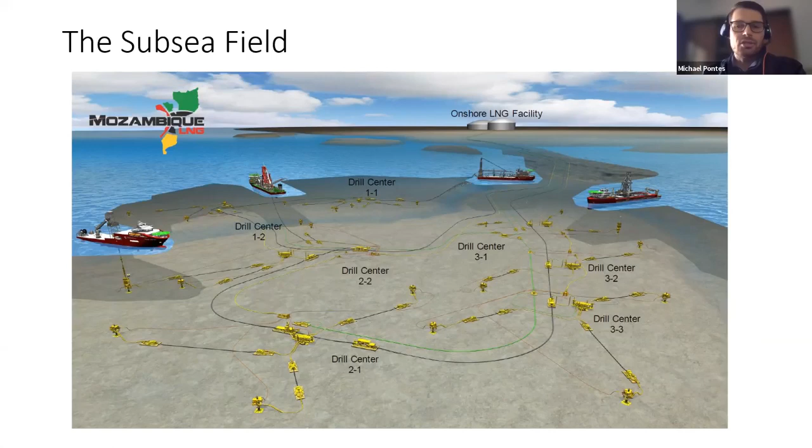We can see the onshore LNG facility that will be constructed in Afungi, and it is connected to the subsea field far offshore. What we see here is several Christmas trees, manifolds, flow lines, various equipment that are going to produce the gas and then allow it to flow back to shore to Afungi. Then what we see here on the surface are various vessels that are involved with the installation of equipment and different operations that we do offshore during the installation and during the lifetime of the field whenever several operations need to be done.

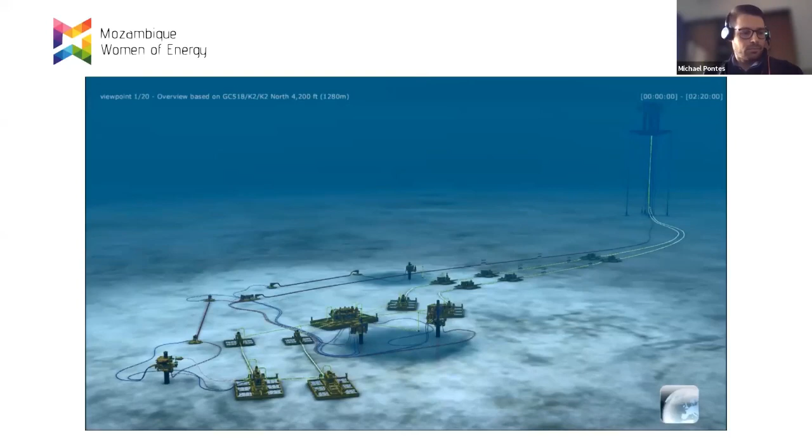The subsea system encompasses all equipment between the reservoir and the host facility seen on the far right of the screen. It is quite literally the conduit through which hydrocarbons are safely transported from their source beneath the ocean floor to a facility where they can be processed. Subsea developments can stretch across tens of miles of seafloor and be located in water depths up to 10,000 feet. To best understand how each component in the system works, we must begin near the source.

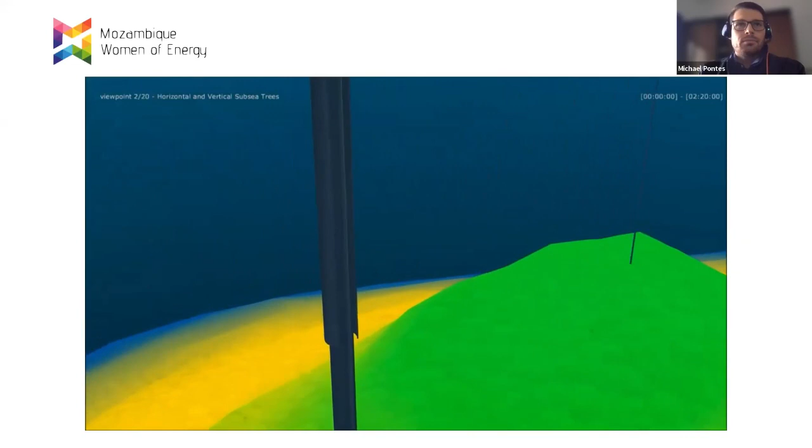As you can see, we are now beneath the seabed looking down at the reservoir, which could be up to 5 miles from our current position. Reservoir size, shape, and composition will play a significant role in the design of the subsea system. In order to move production from the reservoir to the seabed, we must drill and complete a subsea well. The subsea well is comprised of a number of concentric casing strings which are drilled and cemented into place. Once these casing strings are in place, the production tubing is installed at the center of the well. This is the final conduit through which production is transported to the seafloor.

Of the 20 to 30,000 feet of...

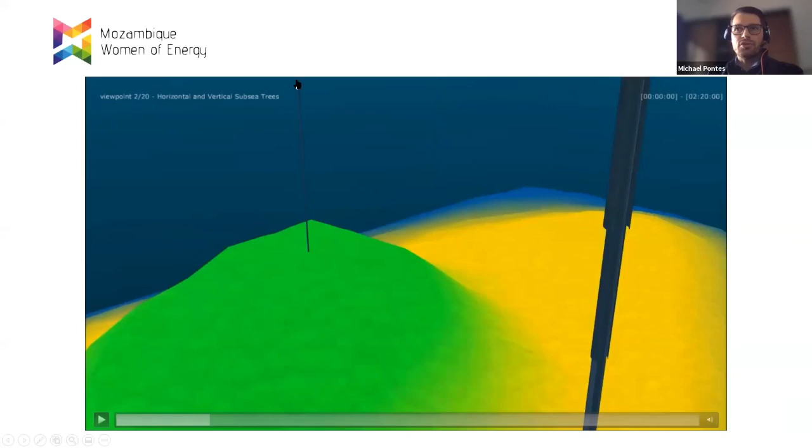So just to recap what we just saw, what we're looking at here now is the reservoir below the seabed, and this could be many kilometers below the seabed. And to reach it, we need to drill these wells to get down to it. And these wells will guide the gas or the oil up to the surface. And here, once they reach up to the surface, they will be processed by the Christmas trees.

I'll allow the video to continue.

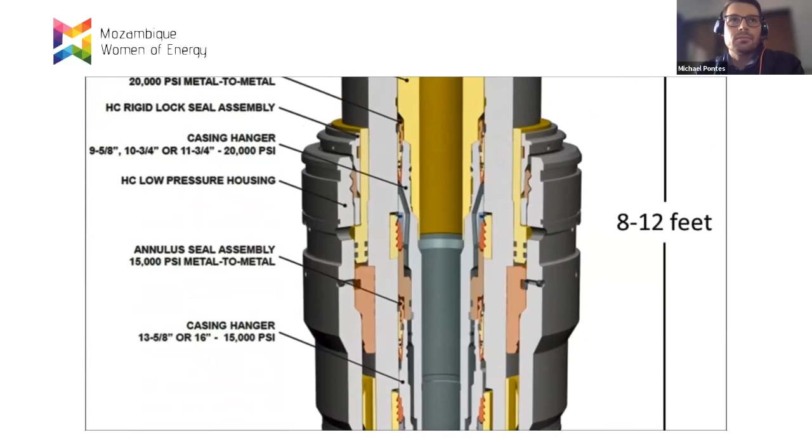Production tubing is installed at the center of the well. This is the final conduit through which production is transported to the seafloor. Of the 20 to 30,000 feet of casing and production tubing, only 8 to 12 feet of the well actually protrudes above the seabed. This top section of the well is known as the wellhead and is where the weight of each casing string is suspended.

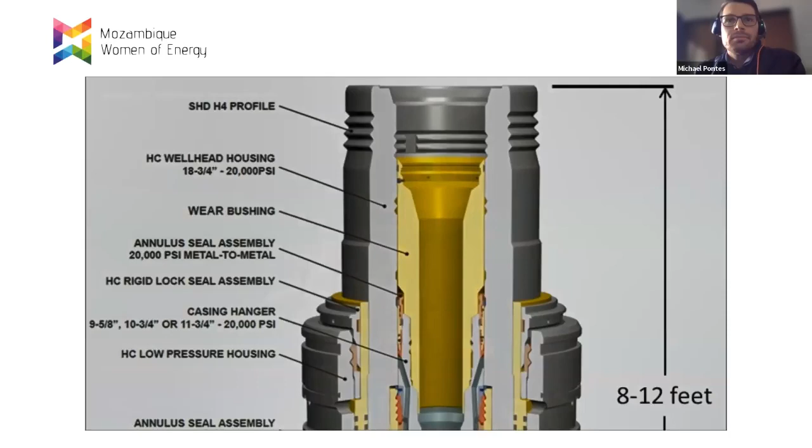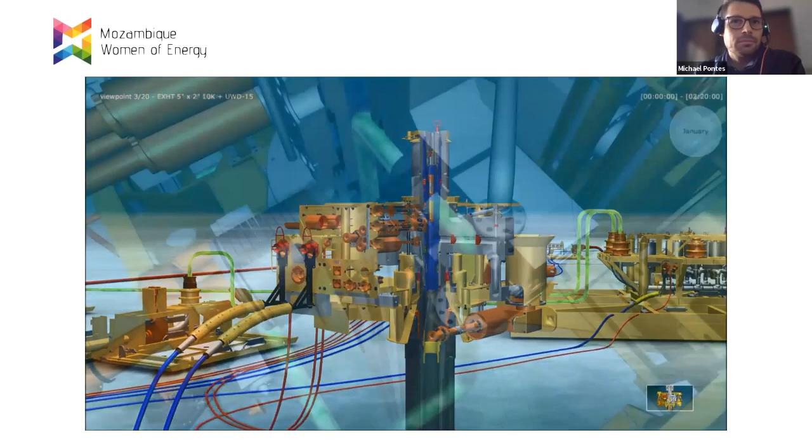Now that we have a conduit, we need a way to safely control the flow of hydrocarbons up and out of the well. This control is provided by a device known as the subsea tree. The subsea tree has several critical roles within the subsea system. First, it is our primary line of defense when containing production from a subsea well. The tree is equipped with gate valves designed to shut in the flow in the event of an emergency or for a planned shutdown within the field.

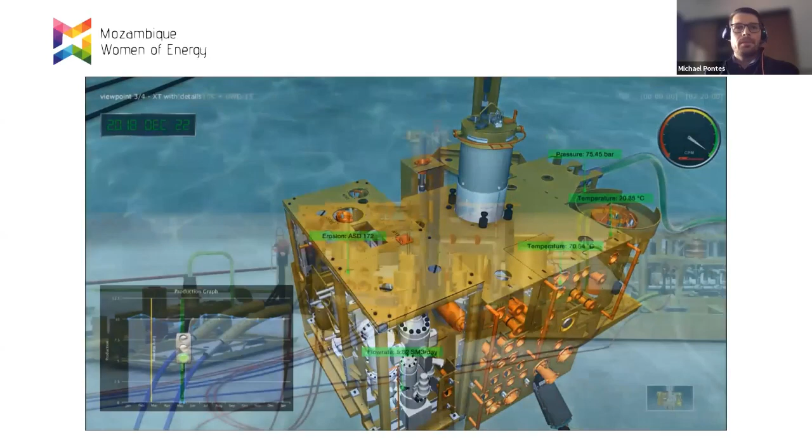Second, the subsea tree allows the operator to regulate the flow of oil and gas from the well through a device called the subsea choke. And last but not least, the tree is equipped with numerous sensors, meters, and chemical injection points which allow the operator to monitor and condition the fluid as it leaves each well. Together, these functions make the subsea tree one of the most critical components in the subsea system.

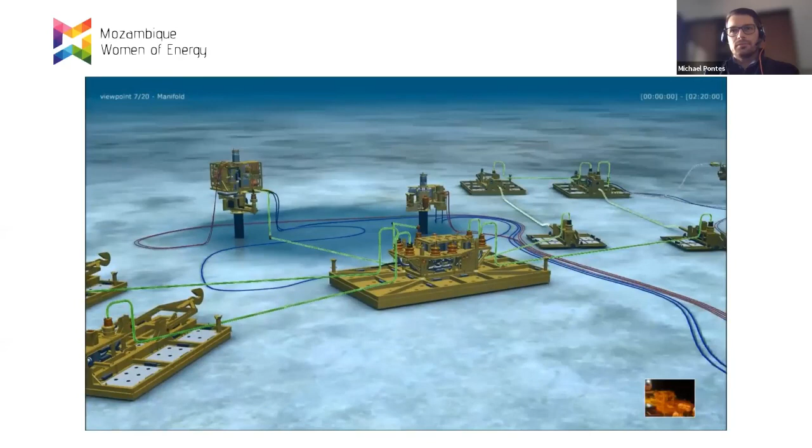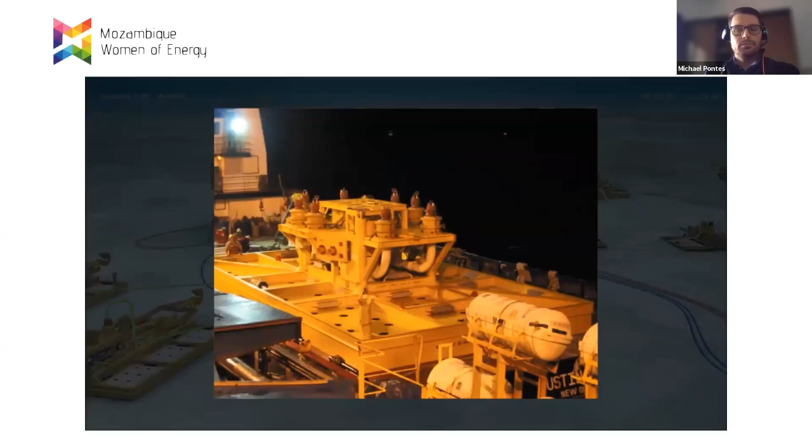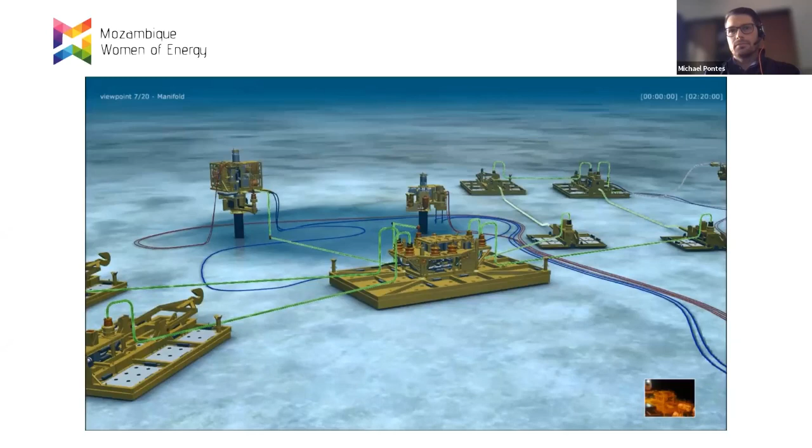Most subsea fields have multiple wells drilled within a common area known as the drill center. In most cases, wells drilled within a drill center will have their production commingled locally and transported back to the facility through one or two larger diameter lines. This commingling process is performed using a device called a subsea manifold. Manifolds come in various shapes and sizes depending on the number of wells, production flow rates, and the number of flow lines used to transport the commingled production back to the facility. Because manifolds are heavy and not supported by a subsea well, foundation structures such as mud mats or suction piles must be used to support their weight on the soft seabed.

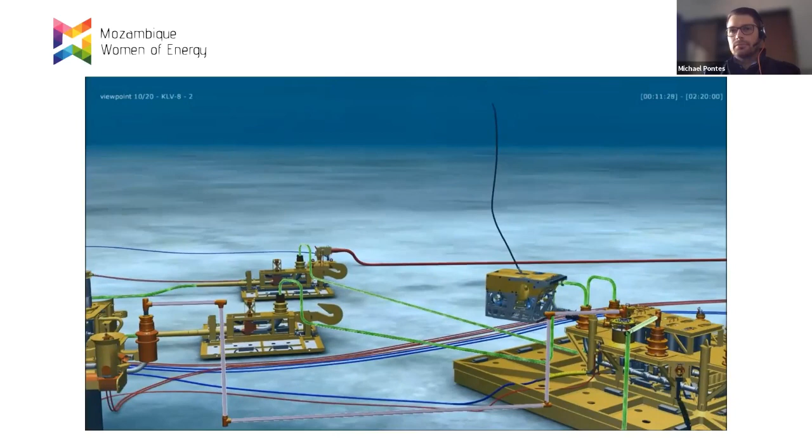To connect each well to the manifold, a device known as a well jumper is used. The well jumper is a short section of rigid or flexible pipe fabricated and installed after the tree and manifold are in place. The well jumper is equipped with a connector on each end which accommodates remote makeup of these connections. As shown here, most subsea connection systems are ROV operated due to the extreme depth associated with most deepwater developments.

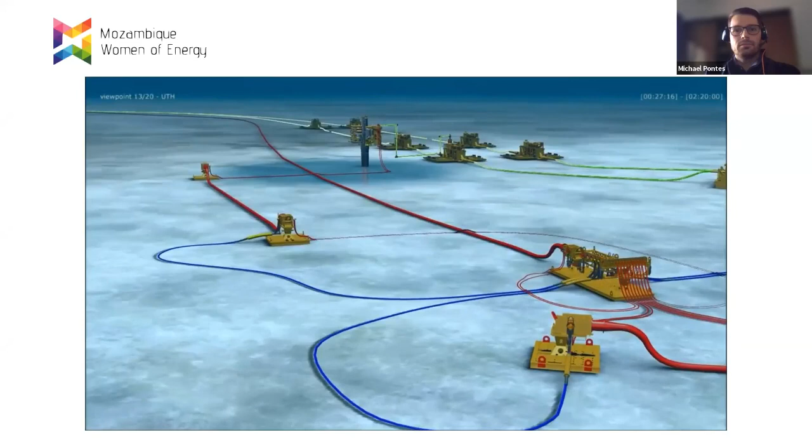In order to control, monitor, and supply power and chemicals for most equipment in a subsea system, an umbilical termination assembly is commonly used. Equipment such as trees and manifolds often need electrical power for sensors and meters, hydraulic power for valves and chokes, and chemicals for flow stream injection. The supply of these commodities is provided through an umbilical and distributed throughout the field from the umbilical termination assembly. Steel flying leads, shown here in blue, transport the hydraulic fluid and chemicals. Electrical flying leads, shown in red, transport the power and communications. Without subsea controls, the subsea system could not function.

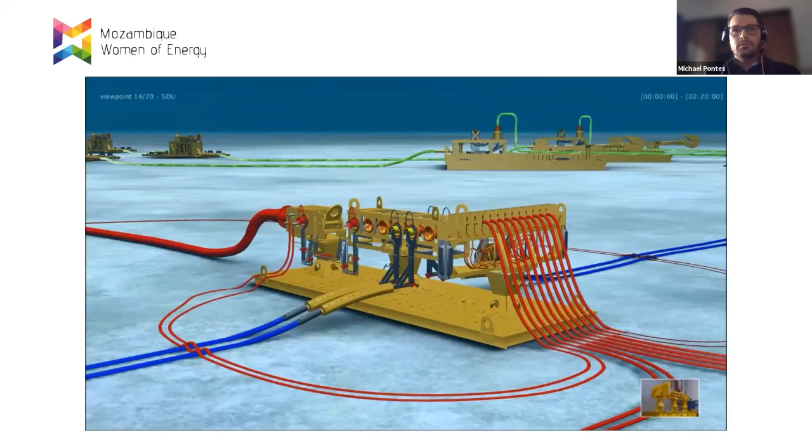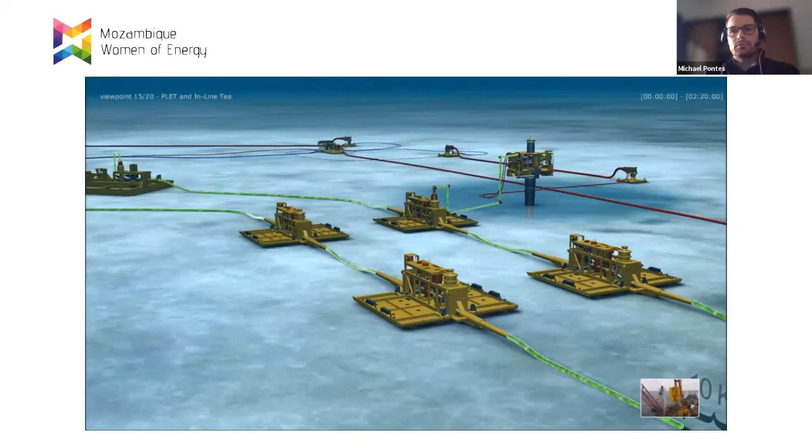Once production leaves the drill center, it moves into the horizontal pipeline section of the subsea system. The transition from vertical jumper to horizontal pipeline takes place at the pipeline end termination assembly, also known as the PLET. To the right, we have in-line tees, which are pre-installed single well tie-in points for satellite wells located outside of the major drill centers. These satellite wells may be part of the initial production profile or could be installed in a future phase of the development. These are the basic building blocks of a typical subsea system.

I hope everybody could see and hear the video well.

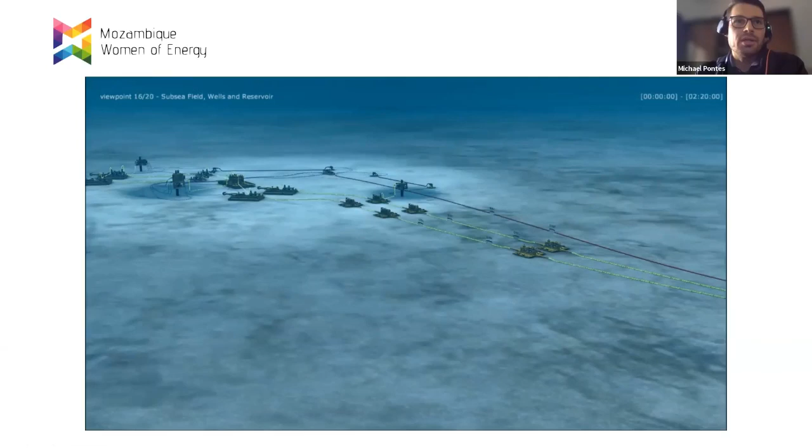That was a brief introduction of what a subsea system looks like. Next, I will get into some more detail of each equipment that we just saw. So this is what we call a drill center. We saw earlier in the video the Christmas trees that sit on top of the wellhead in the well where the gas comes up from, and from there, the hydrocarbons will flow through a jumper onto a PLET and to a manifold.

We see here the PLETs. The reason we need these PLETs is that, although in this image the distances look relatively short, these could be kilometers apart. So it wouldn't be feasible for us to have a single pipe connecting the Christmas trees to the manifold. So we have these PLETs in between that break the pipe into different sections, and they allow the hydrocarbons to flow through. These are the flexible jumpers connecting the Christmas trees to the PLETs. Sometimes these could be rigid jumpers as well.

A 10-inch flow line allows the hydrocarbons to flow between the PLETs. A 22-inch trunk line will carry the hydrocarbons back to shore. An in-line tee will connect this particular manifold to the trunk line as a T junction. Think of it as a crossroads. And our umbilicals bring controls from either a vessel on the surface or from shore. These umbilicals bring hydraulic power, electrical power, and different chemicals to the subsea field that are required.

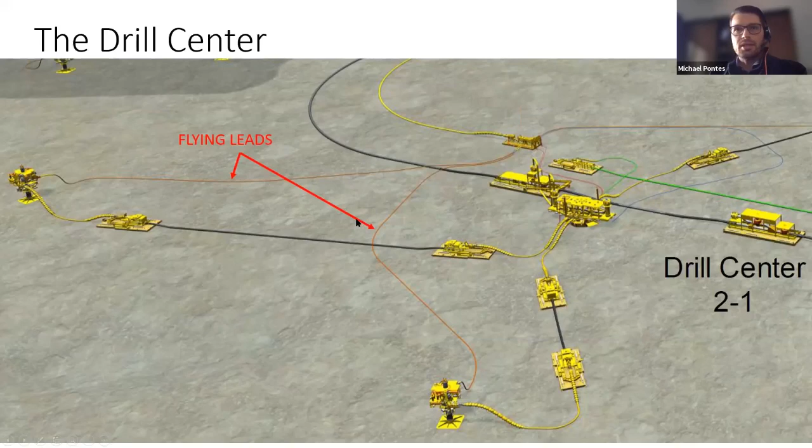Once the umbilical reaches its location, it is terminated at what we call an umbilical termination assembly. And from there, the hydraulic and electrical power is distributed by these flying leads to the Christmas trees and to the manifolds.

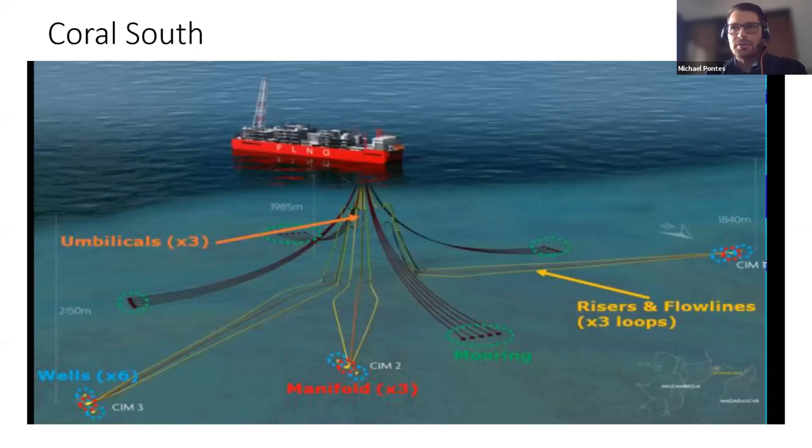So next we'll talk about how we find the oil and then drilling. So how do we find the oil offshore? Seismologists use advanced survey ships to build a map of the formations below. This is done using sound waves produced by the ship that are sent downwards towards the seabed, and they reflect off the various rock formations and reservoirs below and are picked up by hydrophones. These hydrophones are on a very long cable dragged behind the ship. They're very sensitive, and they pick up the sound waves that bounce back, telling seismologists what is happening down below.

In this way, we're able to find, or at least estimate, where the oil is and where we should drill. Once we have a rough idea of where these reservoirs are, we will then drill to make sure of the oil that is there. Until we actually drill down there, we are not sure what oil or gas is there, or the quality of it. So after the seismological survey, we will drill exploration wells down to the reservoir, and we will take samples of that oil.

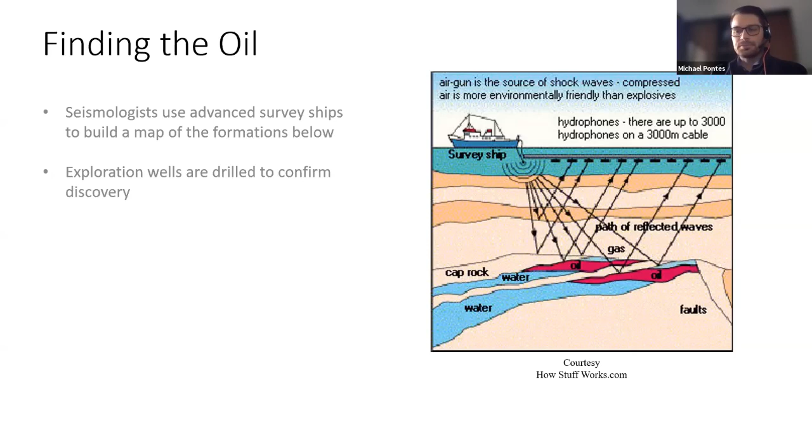So when the oil is found, further studies are done to determine the reservoir size and shape. This is still through seismological studies and through drilling. We'll look for seabed hazards, look for drilling limitations in our subsea and in our drilling path in the ground, and we'll find the number and location of the wells that will be required to drain the reservoir. We want to extract as much gas as possible from these wells, and this study will help us understand where we should drill.

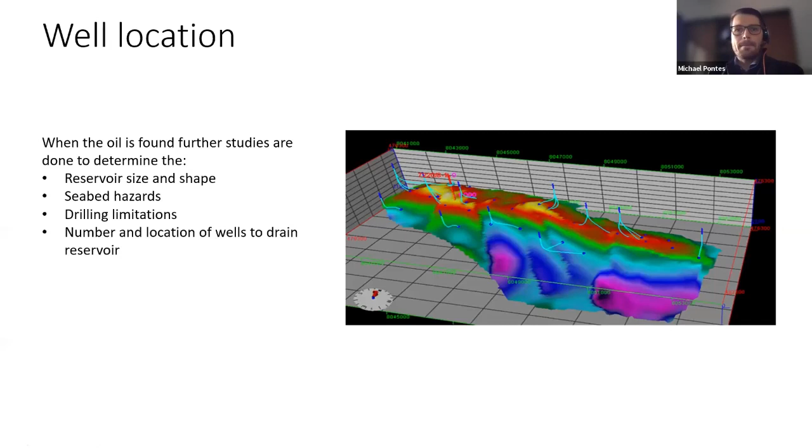How we drill. With the seismological studies done, we need to drill our wells to reach the reservoir. Offshore drilling can be done by different types of drilling rigs, depending on the water depth. With shallow waters, we typically use jackup rigs. These are towed out to sea, sit on the seabed, are jacked up to a suitable height, and from there you can drill.

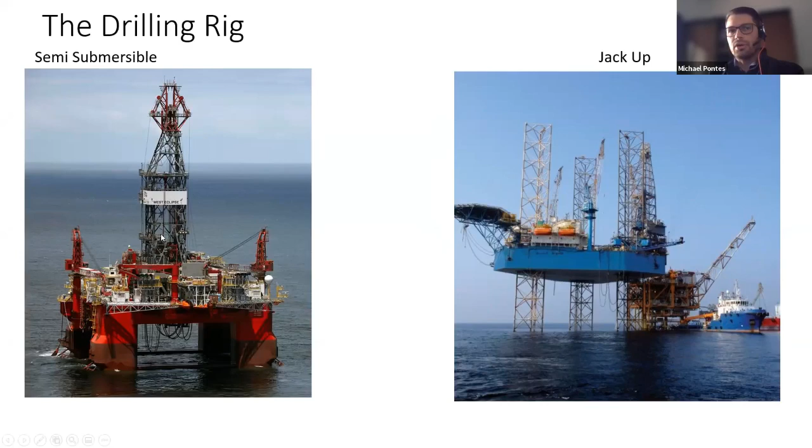When we're going to drill in deeper waters, we possibly use semi-submersible rigs. These can travel on their own, under their own power, and they can drill down to extreme depths. However, both of these rigs are not suitable for long journeys across the ocean.

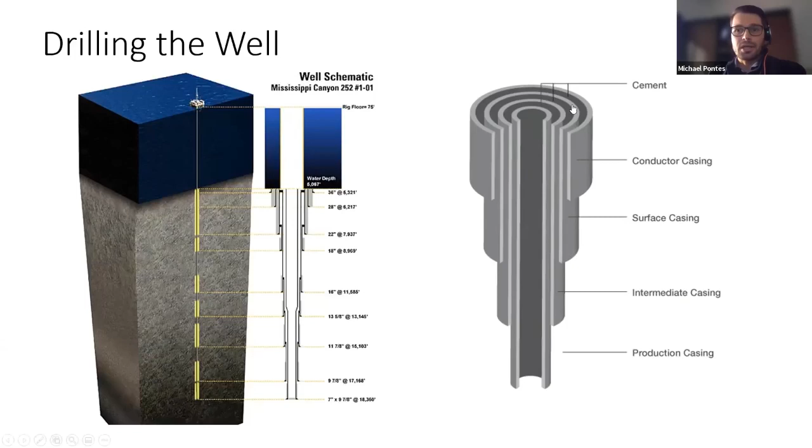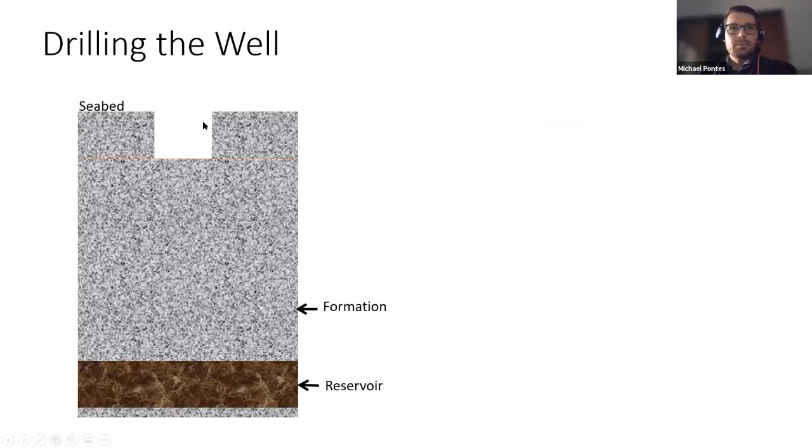So to begin, we first need to locate the well on the seabed. We do this by drilling a 36-inch hole and installing the first and largest steel casing called a conductor, or low pressure housing.

So this first hole is drilled through the soft seabed to just perhaps 100 meters, depending on the seabed conditions, until the harder rock below is reached. The top surface of the seabed is only very soft sand, and below that is harder rock. So the conductor housing is only installed until we reach that harder rock. This first step is also called spudding.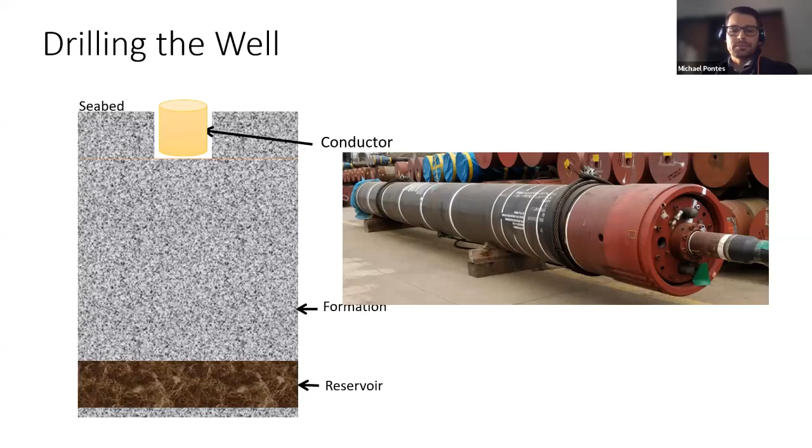After installing the conductor, we will continue drilling for a 20-inch steel casing and wellhead, and then cement it in place.

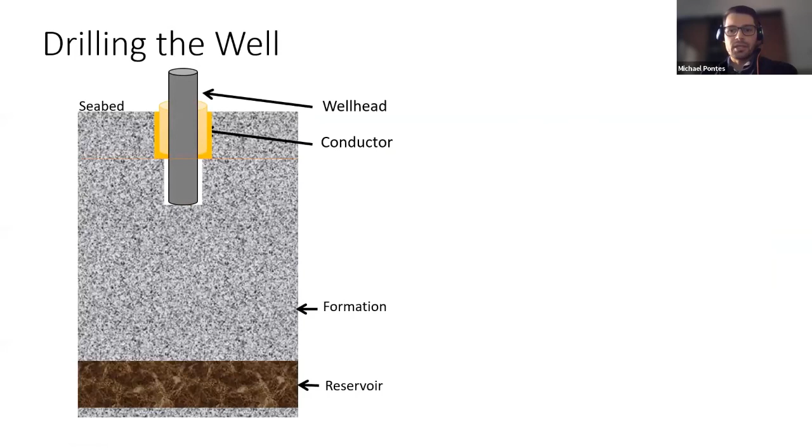On the right-hand side, we see what a wellhead installed in a conductor typically looks like. This is in a workshop environment, but try to imagine that this is the surface of the seabed. What you see here is only what sticks up out of the seabed, and down below this is hundreds of meters of pipe.

So up until now, we drilled in open water without a riser. But going forward, drilling will be conducted through a marine riser, or casing, that stretches from the rig on the surface down to the wellhead we just installed.

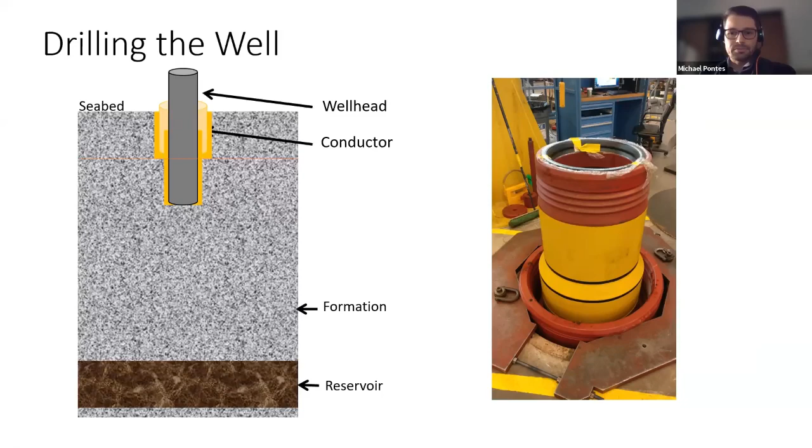So we were drilling without a riser, and as we drill, sand and water comes out of the hole and lands around. But going forward, we're going to drill deeper, and now we must drill with a casing riser. This casing riser goes from the rig all the way down to the seabed, and is used in conjunction with a blowout preventer that gives us safety while we are drilling.

So a blowout preventer, or BOP, is now needed to contain the drilling mud and provide safety for the rig and environment during further drilling. With the casing riser and BOP installed, we now continue drilling.

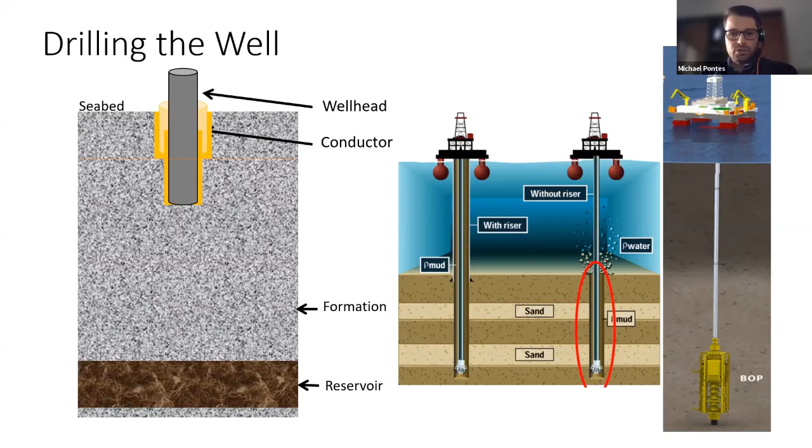For the 14-inch casing, we cement the 14-inch casing, and we continue for the 10-inch casing and then also cement it. At each stage we cement, it is actually cement, but not our normal cement that we use in construction—it's a different type of cement, used to seal the well as we drill and secure it.

Without this cement, it would be possible that the oil and gas would travel around the casing we are installing. The casing is the pipe that we install until we reach the reservoir. So we cement around it to give the well safety, to cement it in place, secure the casing so it can't go anywhere, and to prevent any gas from flowing around the casing.

Once we're done installing the casing, we'll drill through again and install the production pipe. It will be through this production pipe, and only through this production pipe, that the hydrocarbons will flow up from the reservoir to the seabed.

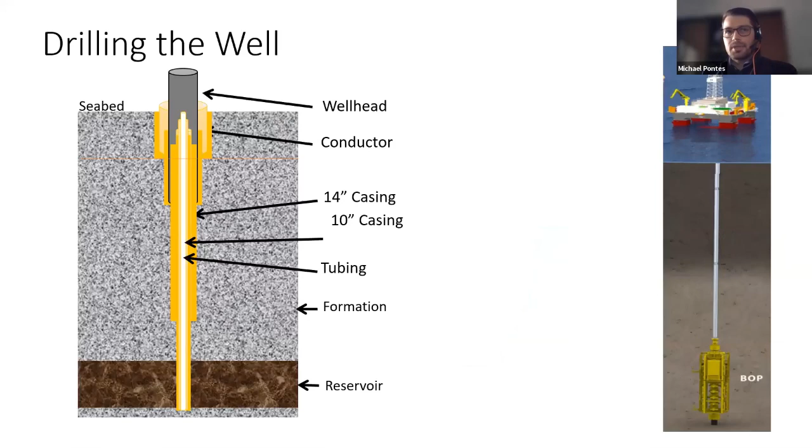So we saw the BOP earlier, the BOP here. This BOP needs to sit and lock onto something, and that is what the wellhead is for. The BOP sits on top here, locks on, and seals so that anything inside of the casing cannot escape to the environment.

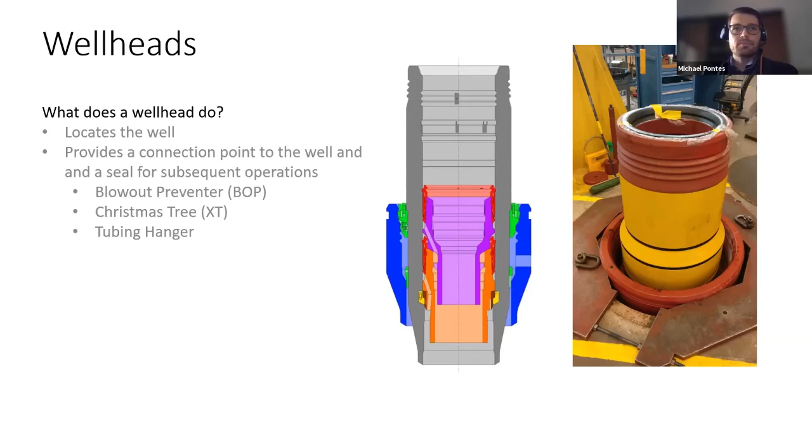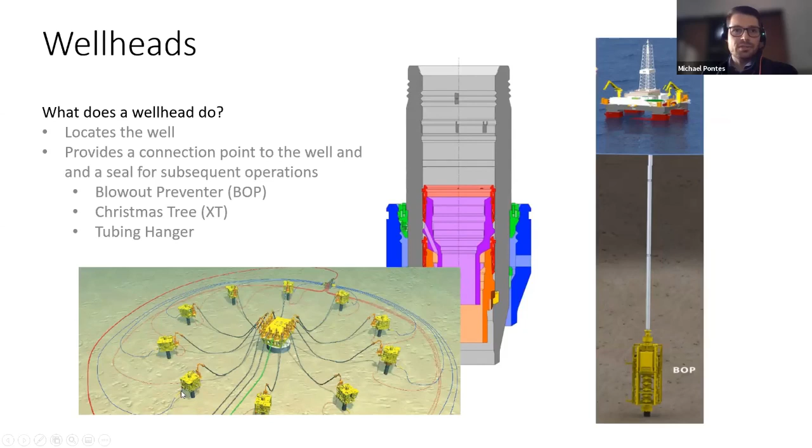Once we're done drilling, the Christmas tree and tubing hanger will also be installed on the wellhead, and this will allow us to control the production fluids after that. We see here several trees installed on these large dark casings—these are the wellheads sticking out of the surface, with several Christmas trees located around a single manifold.

So some considerations for the wellhead design: the wellheads need to survive the bending and vertical loads due to the drilling rig. As you can imagine, the drilling rig is up on the surface of the ocean, and we are drilling down 1,000 to 1,500 meters below the surface. The drilling rig is not completely stationary—it moves a little bit. It tries to stay in place through GPS, but it does move a bit.

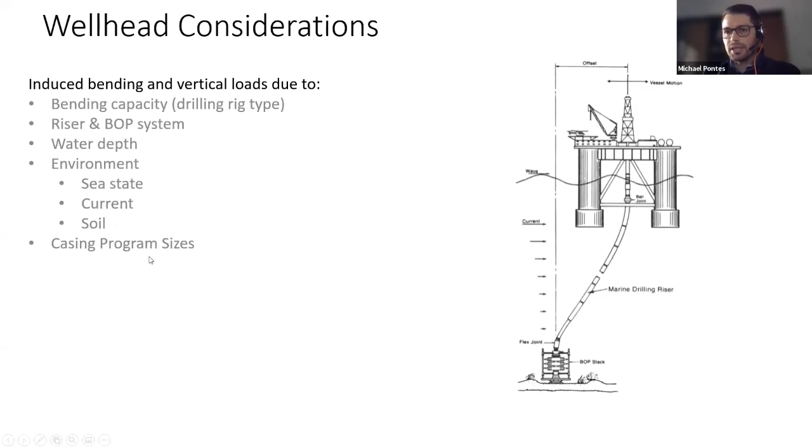And the casing riser from the rig down to the well flexes, so our wellhead needs to be able to survive the push and pull created by this casing riser. There's also the weight of the casing riser and the BOP, the water depths to consider because of hydrostatic pressure, the length of casing, the sea state, the currents, how the soil is made up, and what the actual casing program would look like. We take all of this into account when we design our wellhead.

So we showed the BOP earlier that we need to use for drilling, and this is actually quite an important piece of equipment for drilling, perhaps the most important. This is what gives safety to our drilling operations—a robust safety mechanism for drilling operations.

It is run on the marine riser and landed on top of the wellhead that we just saw. The BOP stack provides multiple safety mechanisms to control the well, including rams, chokes, and kill lines. These are different ways of closing the casing riser, or closing the pipe, so that nothing can flow up. If for any reason we need to stop pressure from below from coming up to the surface, the BOP allows us to close the pipe and nothing will come up.

So the casing riser and the BOP landed on the wellhead provide us a continuous conduit from the well to the seabed, and from the seabed up to the rig on the surface. This allows us to protect the environment.

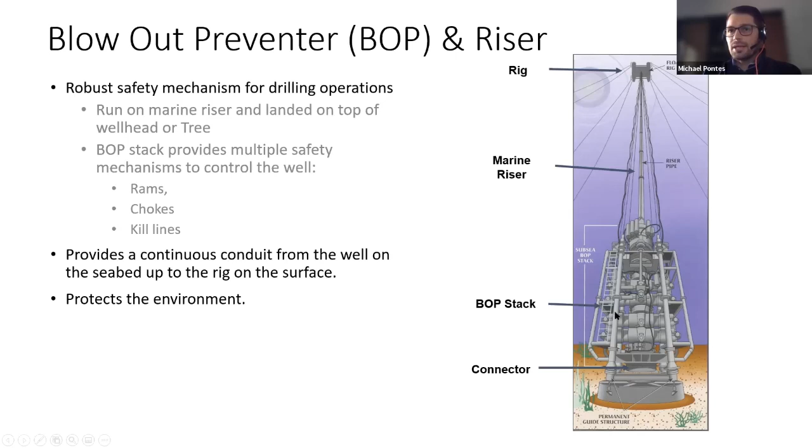This is an example of what a BOP could look like on a rig. They're very large, very heavy, and they have several valves located, perhaps 7 of them, and they allow us to close the pipe while we're drilling.

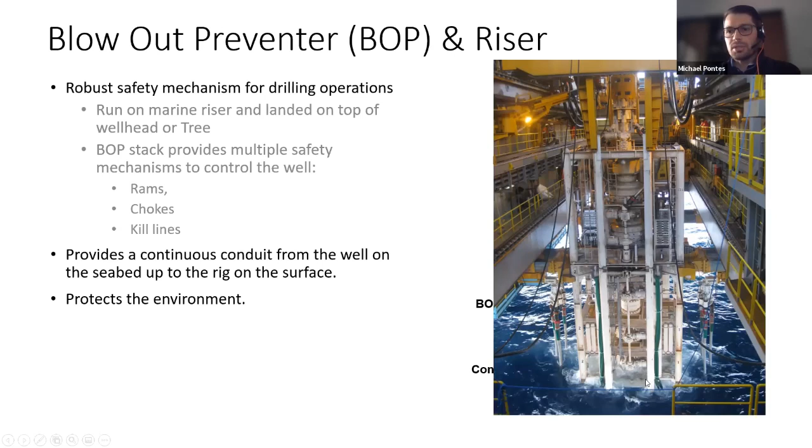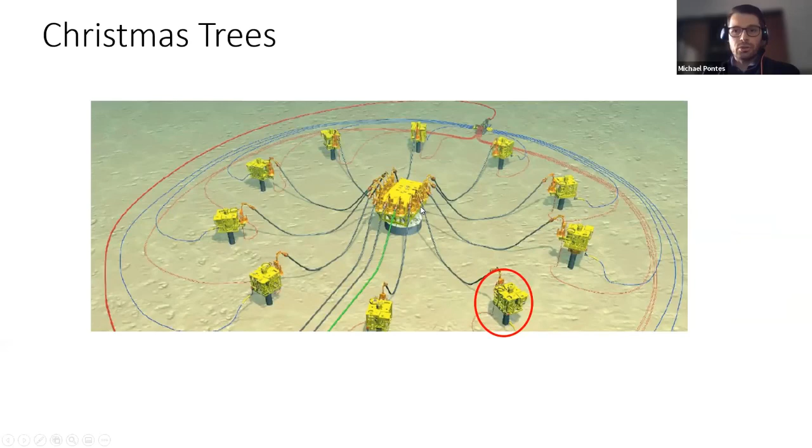So on to subsea completions. We'll start with a Christmas tree. As we saw earlier, several Christmas trees land on the wellheads, which help us control the gas coming up from the wellhead and flowing to a manifold. From here, they will go to the surface, to an onshore factory, or to a floating LNG like the Coral.

So a Christmas tree is an assembly of valves that directs and regulates the flow of hydrocarbons from the well. And the name Christmas tree comes from the shape and structure of the early trees.

This was a question I had when I first started in the industry: why do we call it a Christmas tree? Because it doesn't look anything like a Christmas tree. It's because in the early days, this is what a Christmas tree used to look like on the surface.

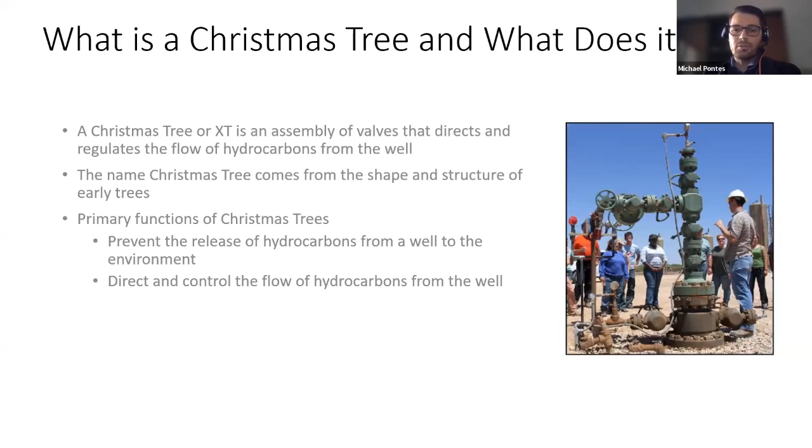So the primary functions of a Christmas tree are to prevent the release of hydrocarbons from a well to the environment, and to direct and control the flow of hydrocarbons from the well.

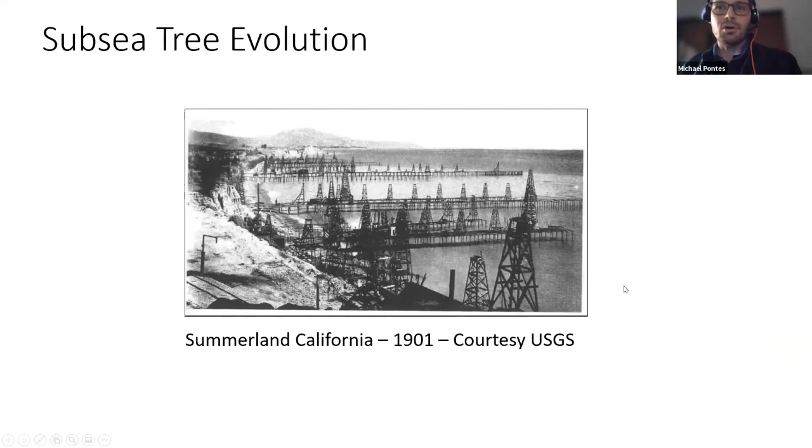You can see in the mid 1970s, we drilled in shallow waters, and we had these subsea trees operated by divers. Today, we've gone deeper and deeper, and it's too deep for divers to go down, so our equipment, the subsea trees, has become more complicated. Today they're operated by robotics and by computers, because we cannot send divers so deep anymore.

So our Christmas trees have evolved, changed shape, become bigger and bigger, as we've reached deeper depths and higher pressures.

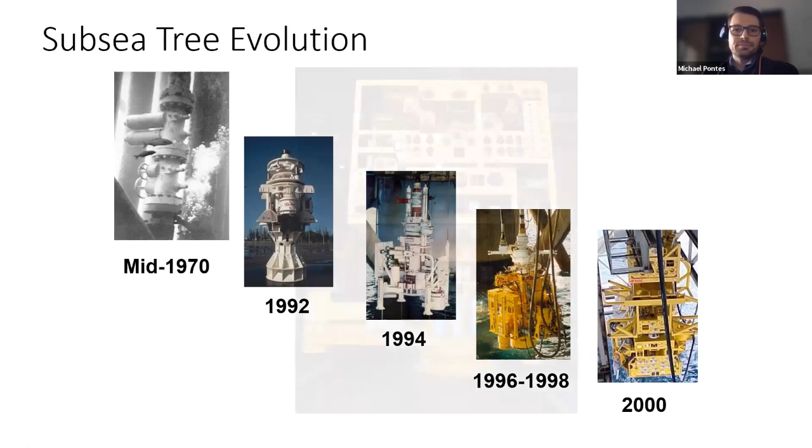And today, this might be what a vertical Christmas tree might look like. They can be, you can see, much larger than they were initially, and these could weigh perhaps 40 to 70 tons of steel.

And they allow us to safely extract the hydrocarbons.

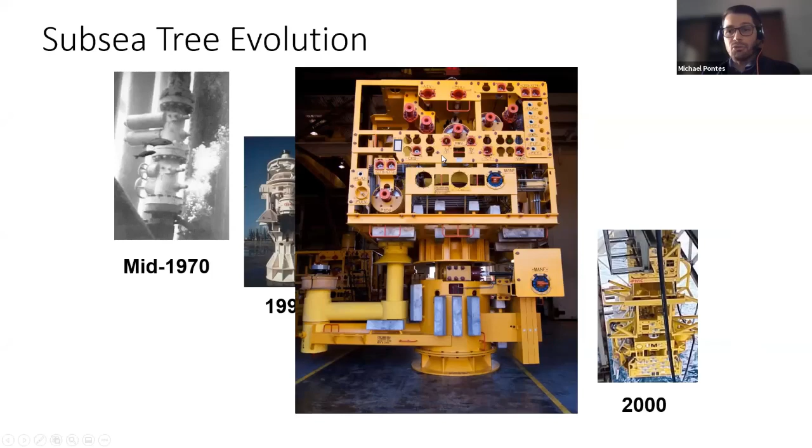We saw earlier in the video an ROV, if you noticed, a robot underwater controlling some valves. It is these valves here that the ROV operates. Because we can't send a diver down, it's done by ROV. So the Christmas tree is designed so that a robot can come down and operate these valves.

So some of the functions of the Christmas tree: they first and foremost provide safety and well control. They provide downhole communications to the surface control, the subsea safety valve. This is the first barrier below the Christmas tree that provides us safety. If we want to close the well for whatever reason, to stop production or for safety, we can close the Surface Controlled Subsea Safety Valve - the SCSSV is a mouthful.

Downhole communications also go to the downhole pressure and temperature sensors that tell us what is happening down below.

They give us annulus access. The annulus is the space around the production tubing. So if there's any need to inject something into the annulus to do some kind of operation, the Christmas tree provides us with that access.

The Christmas tree is equipped with a choke that allows us to control the downstream pressure. So we can control how much hydrocarbons we want to produce, rather than just allowing the hydrocarbons to flow under their own pressure. We are able to control how much pressure we allow to come out of the well.

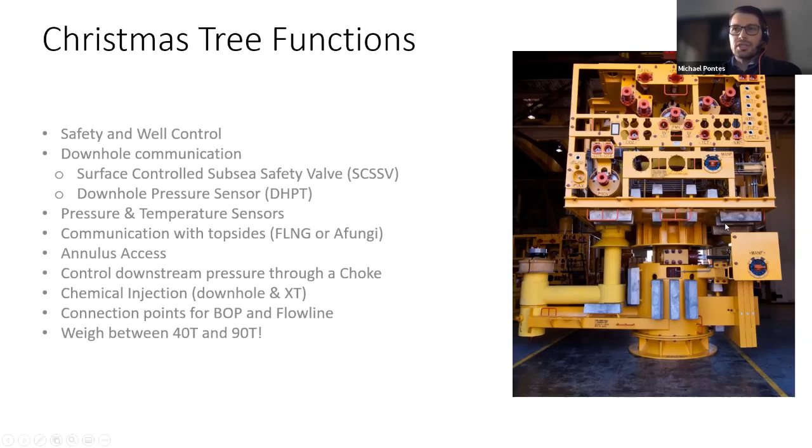Again, the top of the Christmas tree allows us to connect a BOP to perform operations, and these can be quite heavy, 40 to 90 tons. I've seen them that heavy.

So more on safety and well control and how we do this. The hydrocarbons rise up from the well into the Christmas tree, and here they must go past several valves. But as a law, there's always two barriers to the environment. So between the hydrocarbons, the oil or the gas, and the environment out here, there's always two barriers. So these valves, the ROV tree cap, they serve as our barriers, so that we can never have the hydrocarbons escaping from the tree and into the environment.

Further, these valves allow us to control the flow. If we want to, we can close the valves and close the production. Or through the choke further down here, we can control the pressure of the hydrocarbons. So the hydrocarbons flow from the well into the Christmas tree through these valves, and we can always see how it's flowing through the sensors we have on the tree. They flow through these valves down to what we call this U-loop. And from here, they will go to the manifold, and from there, they will go to the factory.

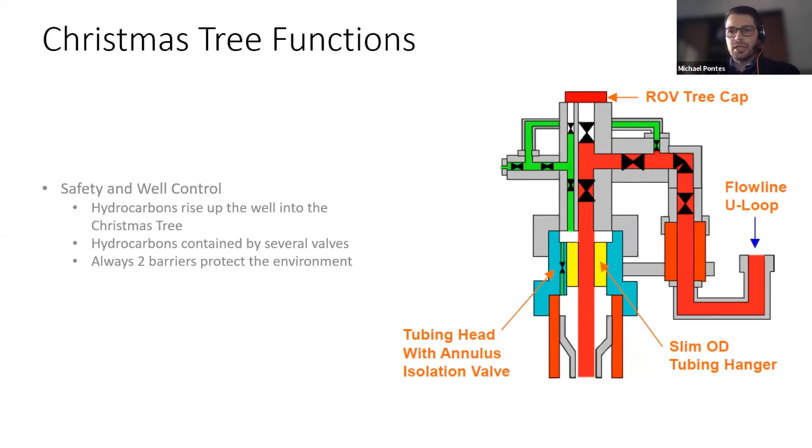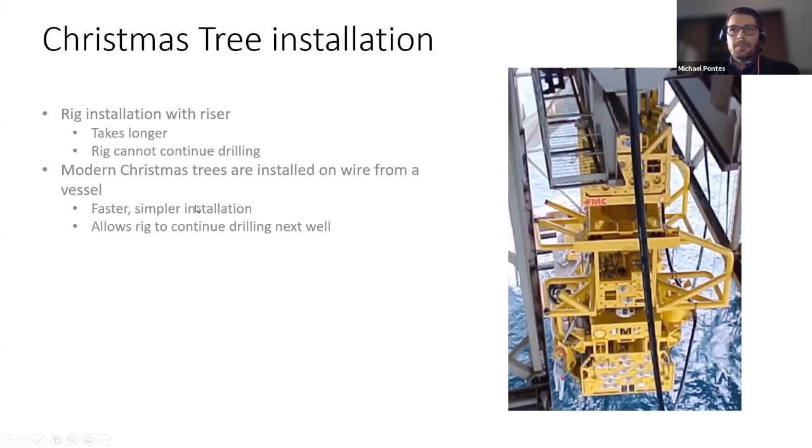So how do we install these Christmas trees? They can be installed from the rig, installation with a riser, but this takes longer, and during this operation, the rig cannot continue drilling. Or, as most modern Christmas trees can be installed on wire from a secondary vessel. This way, we free the rig to continue drilling the next well while we install the tree on wire. And this is faster, it's simpler, more cost effective.

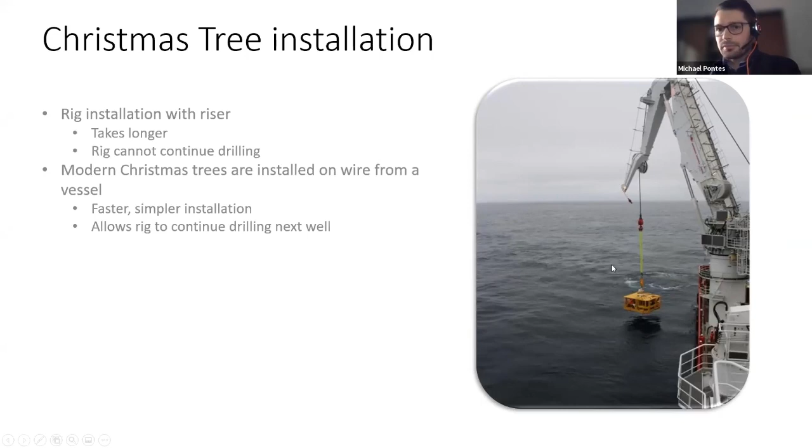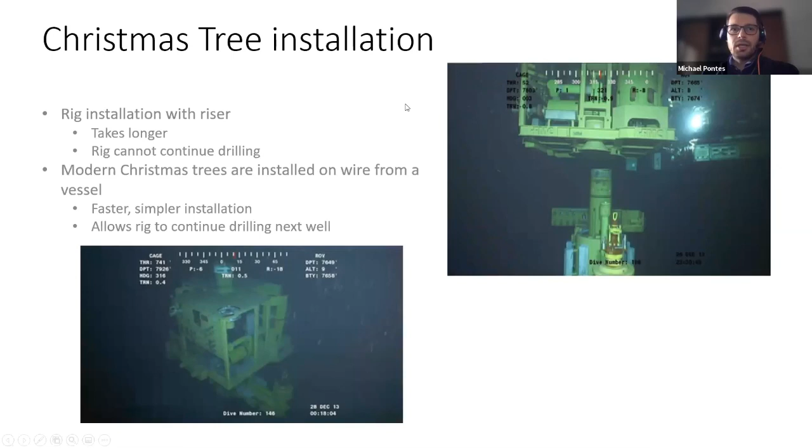We see here first the tree landing in the water and starting its trip down subsea. And finally, it'll reach the well, and the ROVs assist in locating the Christmas tree in the correct location and the correct orientation, which direction the tree will face, before we land on the wellhead. And finally, below, we see the Christmas tree installed in the wellhead.

So Christmas trees generally come in two forms today. They will usually be horizontal or vertical. They both provide the same basic functions that we just discussed, but offer different operational advantages. And it is up to the operator to choose which system will be more cost effective for them. Here in Mozambique, we will see both of them. Not these specifically that I'm showing now, but we will see horizontal Christmas trees and vertical Christmas tree systems, both here in Mozambique.

In general, the horizontal Christmas trees sit directly on the wellhead, whilst the modern vertical trees sit on this tubing head, which in turn will sit on the wellhead. We see here on the right-hand side, the vertical tree is this top part here that our technician here is inspecting, and the tubing head is this bottom side here. And this tubing head sits on the wellhead.

The hydrocarbons will flow up from the wellhead through the tubing head, here in the center, and into the Christmas tree, be controlled through the Christmas tree through the series of valves, and then will come out of this U-loop and out of here. And here will be connected to the manifold, which I will talk about next.

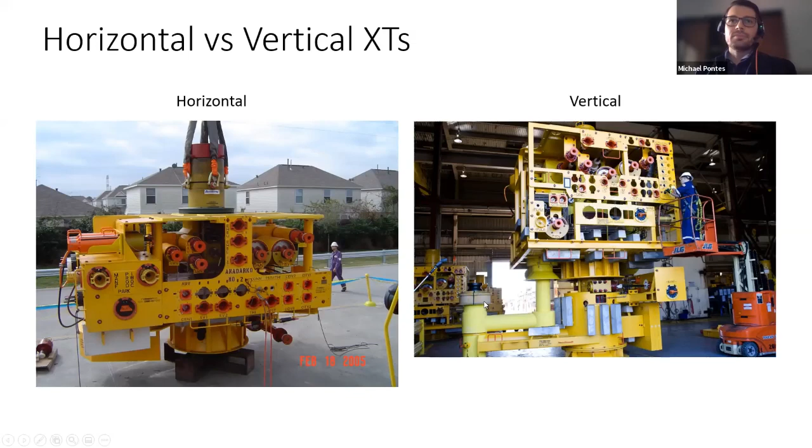So drill centers and manifolds. We saw earlier what we typically see is Christmas trees clustered around a manifold. So multiple wells are feeding their production fluid, the hydrocarbons, into a single manifold. And this allows for easier, faster drilling for the rig.

When we drill, as we saw earlier in one of the first slides, the wells go down in different directions. We don't necessarily drill straight down, but we might drill at an angle. We can change the direction that we drill. So we will drill down, and then we'll start going off to the left, and we will drill almost horizontally until we reach the reservoir. Each of these wells will be going to a different location on the reservoir that might be far apart, but we drill them all close to each other so that the rig can drill one well and then, very close to it, can start drilling the next well, and so forth, without it having to move much. This allows us to save time. Otherwise, the rig would have to move perhaps a few kilometers away to continue drilling the next well.

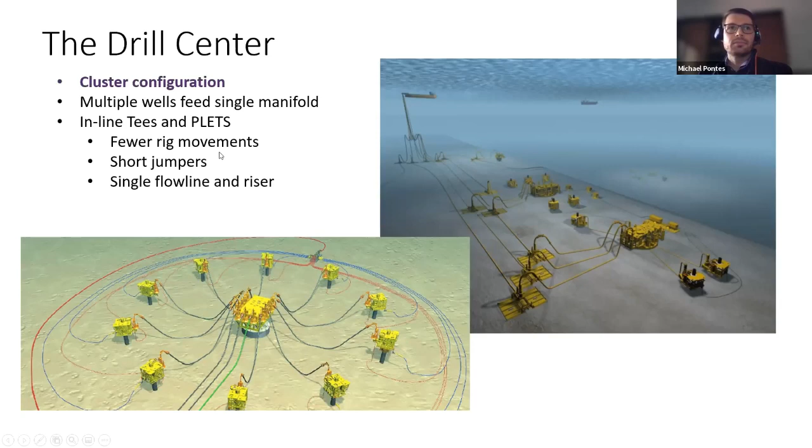Let's have a look at an actual example of a field in the Gulf of Mexico. This is just one drill center of several for this field. And we can see that this particular field has 20 Christmas trees clustered around 2 manifolds. And these 2 manifolds will feed 2 flow lines. These flow lines will then, as I was saying earlier, flow to, say, a floating LNG or a rig or back to land, whichever the case may be for the project. In Mozambique, we will see for Coral LNG, the floating LNG, and for the Mozambique LNG, we will see these flow lines going back to Afungi.

Without the use of these manifolds, each Christmas tree would need its own flow line and riser connecting it to the rig on the surface. Each Christmas tree is landed on the wellhead on one well, and production from each tree goes into the manifold. From the manifold, it flows into just these 2 flow lines. So all of this production from 20 trees goes into 2 manifolds, then to 2 flow lines. If we did not have the manifolds, each tree would need its own flow line flowing back up to the rig, which would add a lot of cost and complexity to the project.

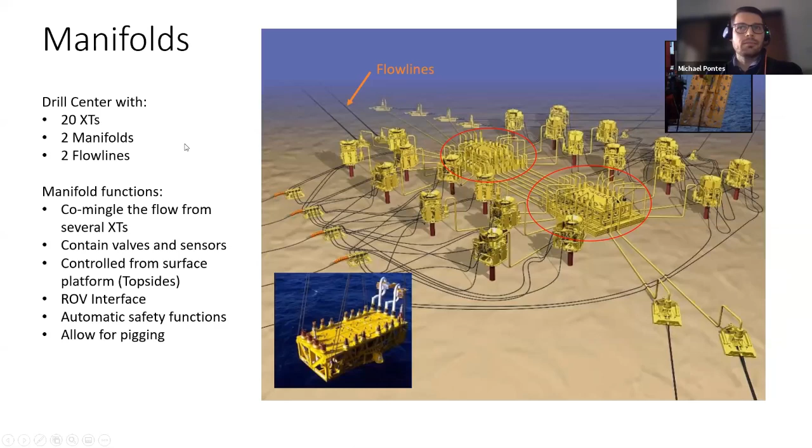So a quick overview again of the manifolds. They come in different shapes and sizes, and they commingle the flow from several wells, usually into 1 or 2 flow lines. They come in 2 to 10 slot manifolds. As we saw here, these are 10 slot manifolds because they each receive 10 Christmas trees. Their branch sizes range from 4 to 7 inches, and the flow lines from 5 to 12 inches, as this old slide says, but we can see as big as 22 inch.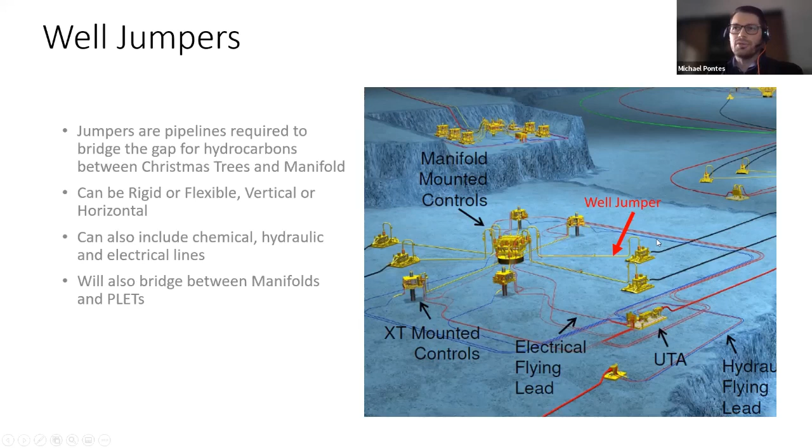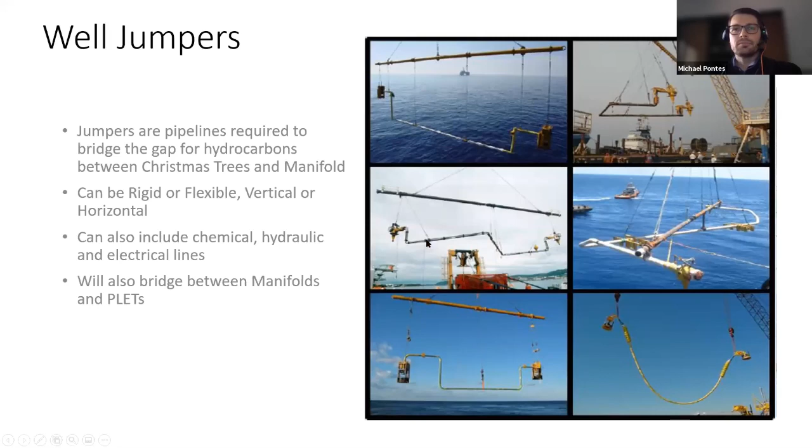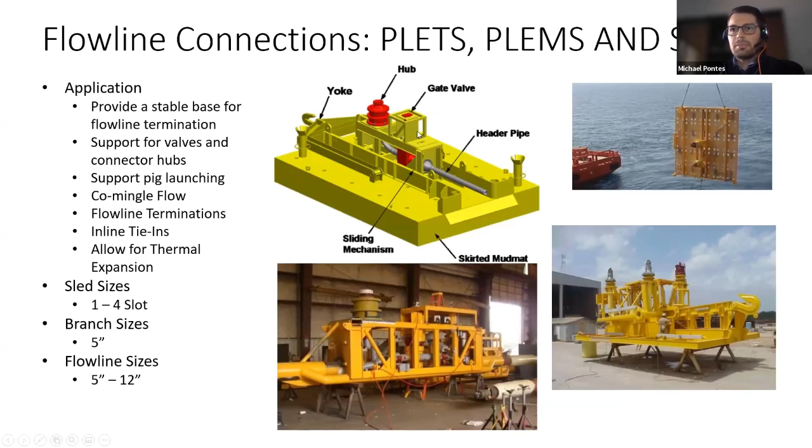We also sometimes have inline tees that will join the manifold into the flow line. And they can come in various slots. We saw here this PLEM that is used only to connect one tree, but we could make it with more slots. It effectively becomes a manifold, but it would just be smaller.

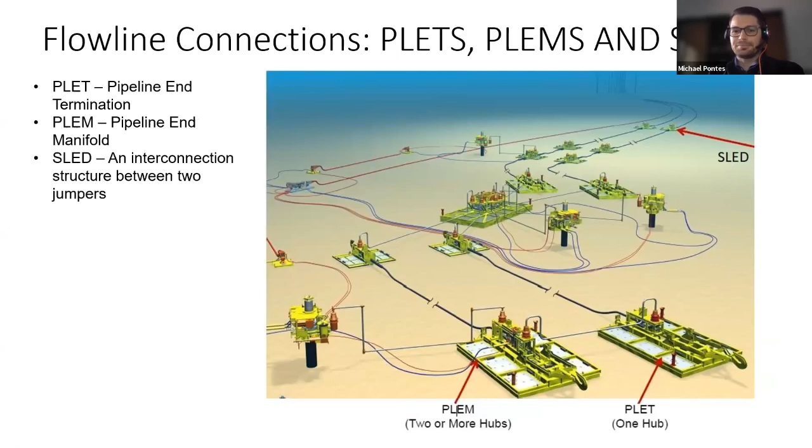So all of this subsea equipment on the seabed needs to be controlled. We have Christmas trees, manifolds, subsea processing systems, and they all need to be monitored and controlled to ensure continuous and safe production. To achieve this, the Christmas trees, the manifolds, and the distribution systems include a computer called an SCM, or a Subsea Control Module, that looks like this. These complex computers allow remote monitoring of sensors and operation of valves on the equipment.

These subsea control modules are connected to the topside control system on the surface platform by kilometers of umbilicals, hydraulic flying leads, and electrical flying leads. What we see here in this particular field in red, coming down from our floating production platform, is this red pipeline, which is an umbilical. Through this umbilical, our topside controls, our operators, are able to see everything that is going on offshore by having it connected to the manifolds and the Christmas trees.

So from here, they can provide electrical power, hydraulic power, and we are reading what the sensors on the trees and the manifolds are telling us. We can see the temperatures, we can see the pressure, we can see if valves are open or closed. We can see how much production we have on each of these trees and on the manifold. So this is done by the umbilical.

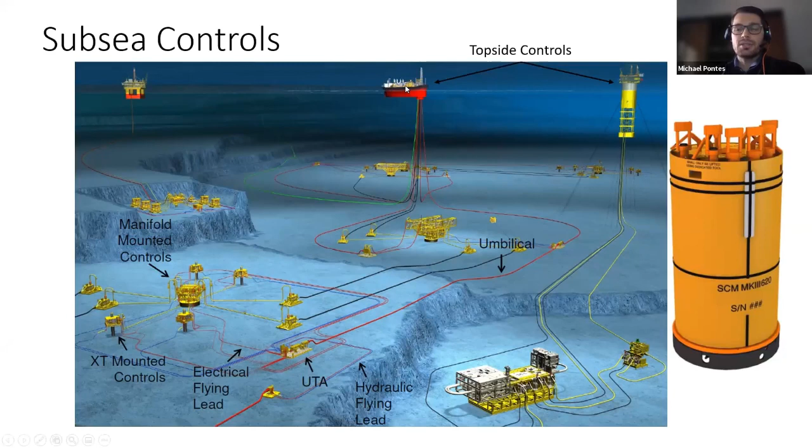Take a look at what the umbilical looks like. This is just an example. We can see we've got various chemical lines, hydraulic lines, electrical lines, all in one umbilical. And it is made of several layers that give it protection. The first layer giving it protection from, say, abrasion. And then we've got layers that give it strength and layers that contain the pressure inside it.

And then various lines to give us hydraulic power, electrical power, distribute chemicals, and our fiber optics to control our equipment.

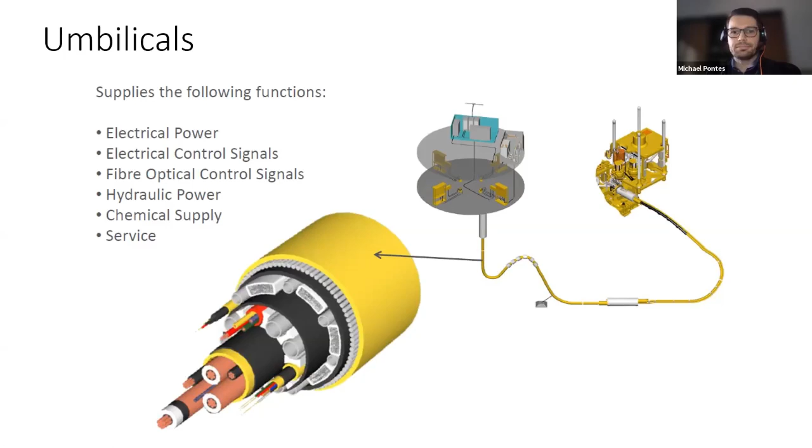Finally, as I was saying, besides the topsides controls, not every valve or necessarily every equipment is operated from the surface, from our topside controls. Sometimes we need to send a robot down there to operate the valves for us. Perhaps if the valve does not respond to our control, then we will need to do it manually, and we do this by sending an ROV.

We use ROVs today because we are too deep for human divers. As I was saying earlier, we can be 1,500 meters deep and we can't send a diver down there. Divers go to perhaps 300 meters with very specialized equipment, and they can only spend a short amount of time when they're there. So when we go deeper, we use these ROVs, these remotely operated vehicles, to do the job for us. They're not autonomous.

A human operates them. They don't go down. The human stays on the surface and operates them by a cable, and they do the job for us. So they assist us with the subsea operations. They have cameras. They have these arms and hands, and they can do the job for us.

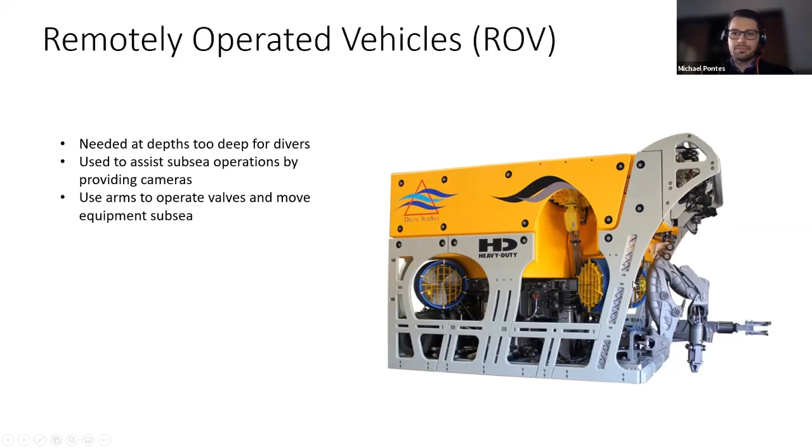So I'm at the end of my presentation. The subsea field has many opportunities. We don't look for just technical roles. We require many support roles. I know some of you watching this presentation now and listening are looking for this. How can you participate in this industry? How can you participate in these exciting projects that really are partly the future of Mozambique?

For the next 30 years or 40 years or even longer, we will have need for mechanical engineers, electrical engineers, industrial engineers, welders, technicians, fabrication technicians in Mozambique, and other support functions that we need in our offices to make things run. Legal, finance and accounting, human resources, logistics, trade compliance.

These are very big operations. We install a lot of equipment. We have many vessels coming. And we are operating not just in Mozambique, but in several countries. These projects perhaps involve thousands of people throughout the world. And due to their complexity, we're not looking for just engineers. We're looking for all the support functions that go around it to make it happen.